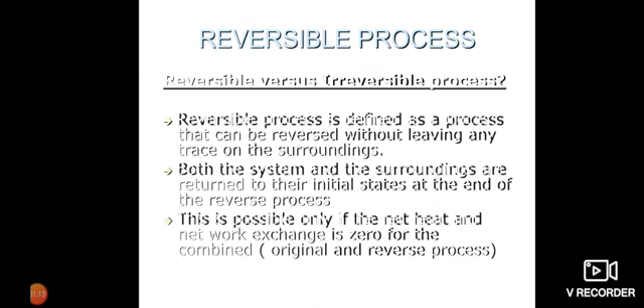This is possible only if the net heat and work exchange is zero for the combined original and reverse process.

This is a theoretical process. So we mean to say that no process is reversible in nature. Reversible is just a theoretical concept. In practical, it is not possible for any process to be reversible. The real processes which really occur are all irreversible - that means they cannot come to their initial state once they are initiated. All real processes are irreversible, and the reversible process is a theoretical process used as a limit for the corresponding irreversible process. So to study any irreversible process, we take the help of the reversible process - that is just a reference, for reference purpose only.

Irreversibility is caused by friction - when there is friction, irreversible processes occur. That is why we always say that friction is a very important phenomena.

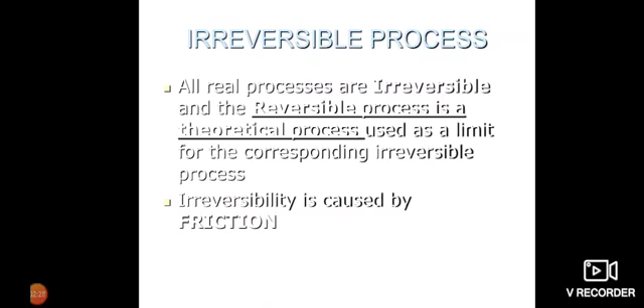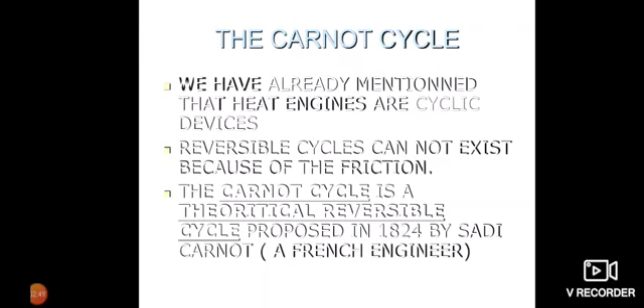The Carnot cycle - we have already mentioned that heat engines are cyclic devices, I told you about that in my last slide. A reversible cycle cannot exist because of friction. The Carnot cycle is a theoretical reversible cycle proposed in 1824 by Sadi Carnot, a French engineer.

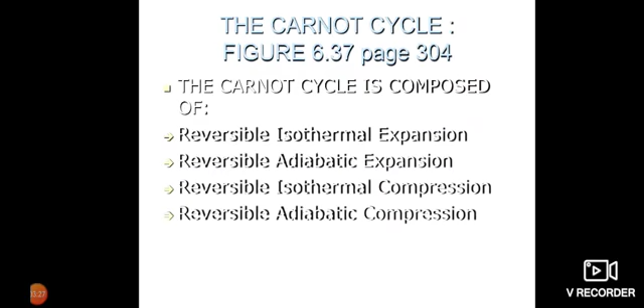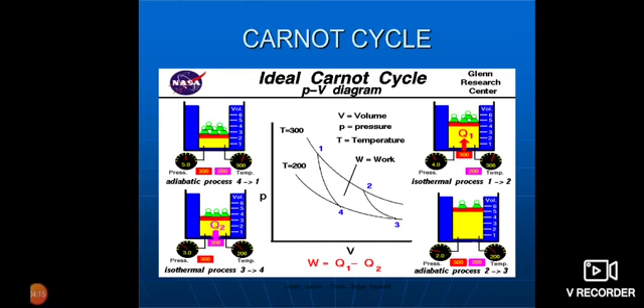Mentioning here, look at this Carnot cycle, the ideal Carnot cycle. First, 1 to 2 is the isothermal process, and 2 to 3 is the adiabatic process. 3 to 4 is the isothermal process again, and 4 to 1 is the adiabatic process. We have pressure against volume, and T is the temperature here. You can see the graph goes from 1 to 2, 2 to 3, 3 to 4, and 4 to 1, where work done equals Q initial minus Q final, Q1 minus Q2.

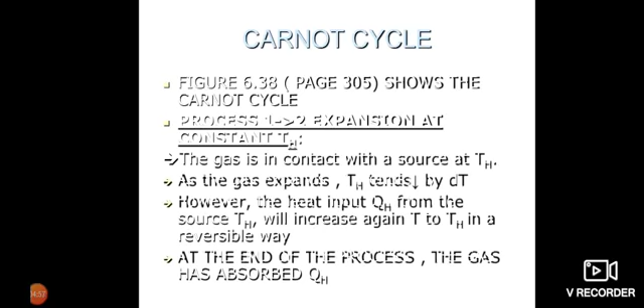In the Carnot cycle, process 1 to 2 is expansion at constant temperature. In the previous diagram, the gas is in contact with the source at high temperature. As the gas expands, the high temperature changes by dT. However, the heat input from the source will increase it again to Th in a reversible way. At the end of the process, the gas has absorbed Q of H.

Process 2 to 3 is the adiabatic expansion, where temperature drops from TH to TL. At state 2, the reservoir is removed and replaced by insulation. The gas continues to expand slowly, doing work on the surrounding.

Process 3 to 4 is also known as isothermal compression. At state 3, the insulation is removed and the gas is in contact with a sink at lower temperature. The piston is pushed inward by an external force, doing work on the gas. As the gas is compressed by dt, the sink absorbs this elevation of temperature. At the end of process 3 to 4, the gas has rejected Q at lower temperature.

The last process is adiabatic compression, where temperature rises from TL to TH, higher temperature. The sink is removed and the insulation is put back when the gas is compressed in a reversible manner. The gas returns to its initial state, which completes the cycle.

Now the efficiency of a Carnot heat engine. The second law of thermodynamics states that no heat engine can have 100% efficiency - in my last slide I told you the maximum efficiency is for the reversible cycle. For a Carnot heat engine, Carnot efficiency equals the theoretical reversible value: 1 minus QL/QH, which equals 1 minus TL/TH, where L and H are the lower and higher temperatures, and temperature is always taken in the Kelvin scale.

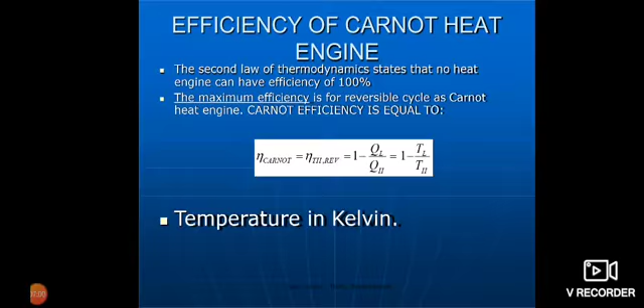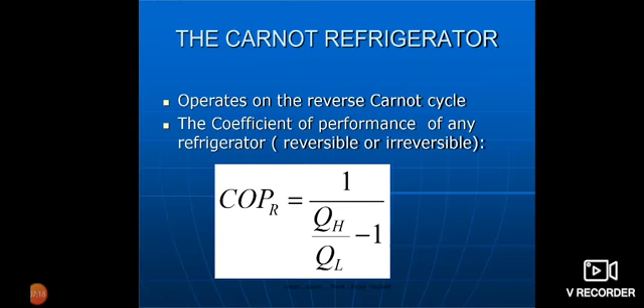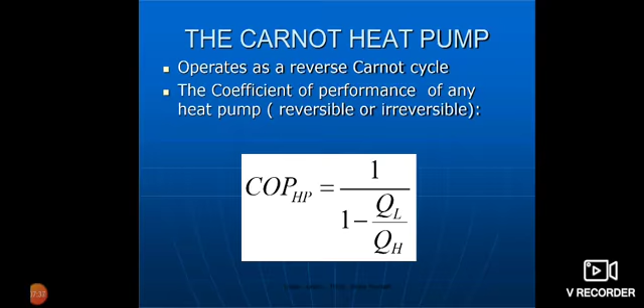The Carnot refrigerator operates on the reverse Carnot cycle. The coefficient of performance of any refrigerator, reversible or irreversible, COP of refrigerator is given by 1/(QH/QL - 1). COP of heat pump is given by 1/(1 - QL/QH). For the reversible refrigerator, COP is 1/(TH/TL - 1), and for the reversible heat pump it is 1/(1 - TL/TH).